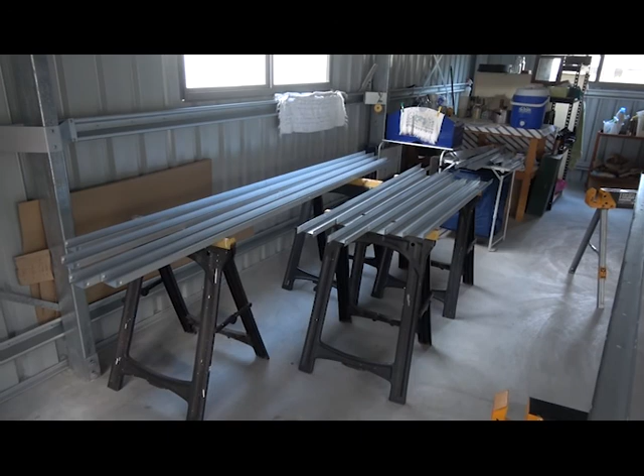Just lay them out on these couple of little trestles. So we've got all the bits and pieces, let's unpack them.

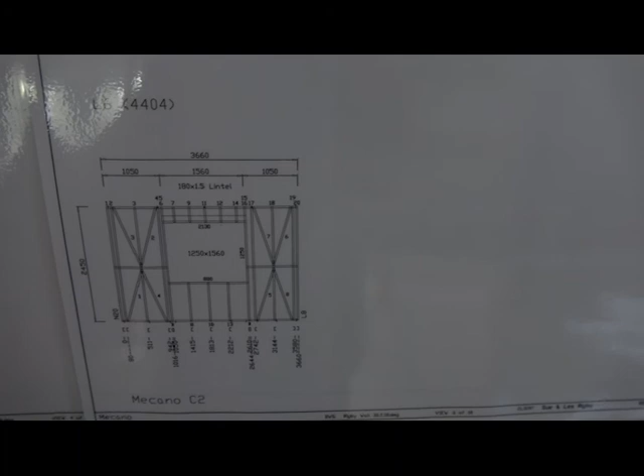Today we're going to be doing wall number... what are we? Let's have a look here. We're going to be doing this wall here, which is L6. Now it's along the back.

L6 is on the plan up here. This wall here is the bedroom wall, the back bedroom. That's the kitchen, bathroom area. It's this wall here that we're doing, so L6 is what we're looking at.

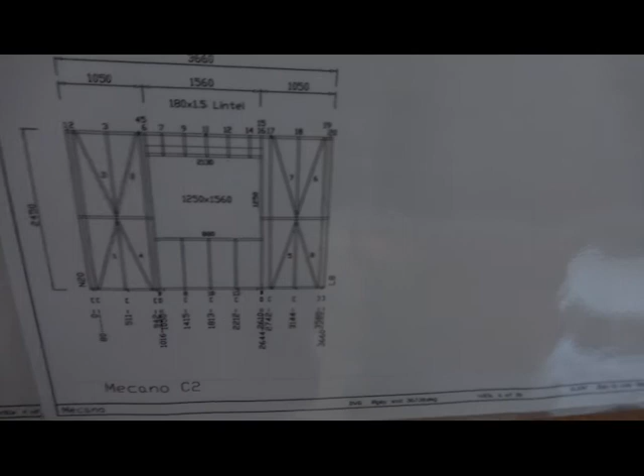As you can see, along the bottom here, it shows you which way the channels face. And that's very important.

Now what happens then is I'll lay them out, and if you come down to this channel, which is the bottom, this channel here is a bottom plate.

So that's the bottom, they mark them with a BP. And this is the top plate of this wall, plate 6.

Now we have all of the numbering on these beams. It's got to be on the left-hand side. So you work from the bottom, as long as the numbers are to the bottom plate and to the left-hand side, we're pretty right.

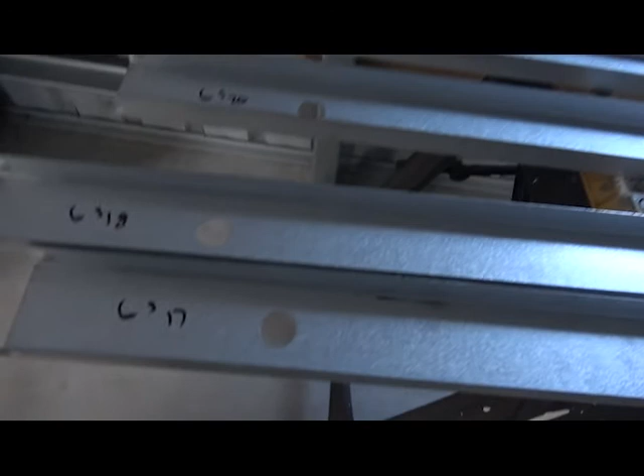Now we pick up number 1, stud number 1, which is this fella.

And it goes across, so we've got our numbers to the bottom, and we're on the bottom plate on this side.

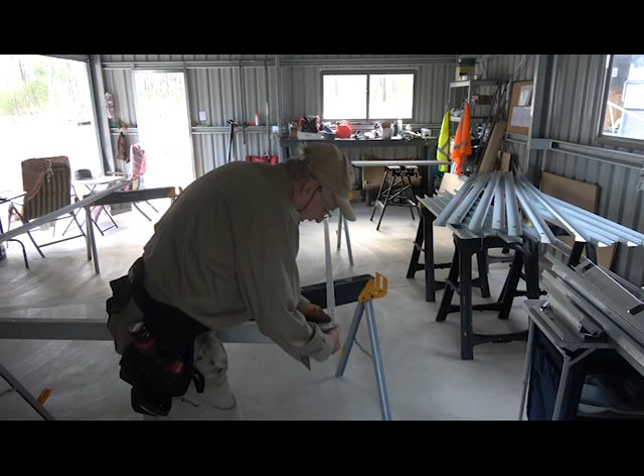So what happens is we put that together like that. They just click in, and then we just put a screw.

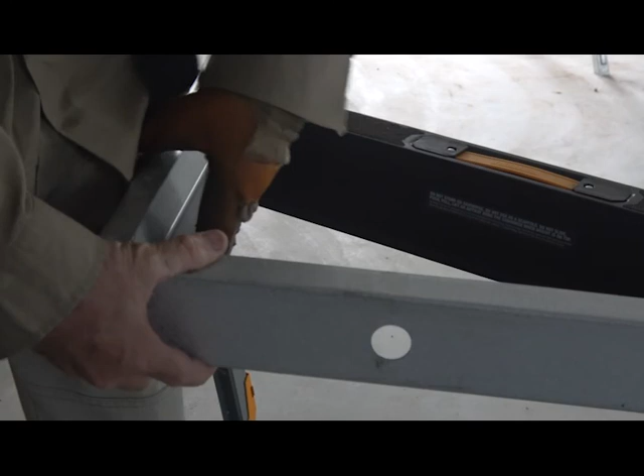Straight in there. So they fit in. There's a little dimple in the screw. There's a dimple on either side, and they just fit into that dimple and click in.

And then you line your hole up, and away you go.

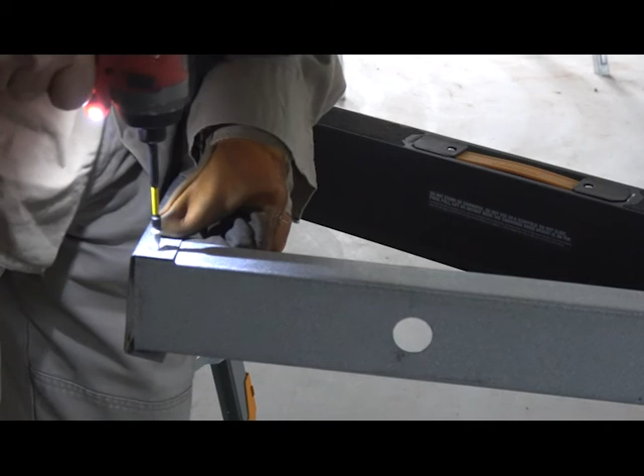Usually I rattle it up till I can see that edge there, the face there, up tight against the other piece.

Now all the studs are made just a little bit smaller than the bottom plate and the top plate so that they fit into each other. They're a couple of mils smaller, but those little dints are really good because they just line it up automatically basically.

Now the noggin part, this is the noggin, it's the bit that holds through there. So we've got to have the plate, this top plate facing up, and we slide these beams in through these little holes.

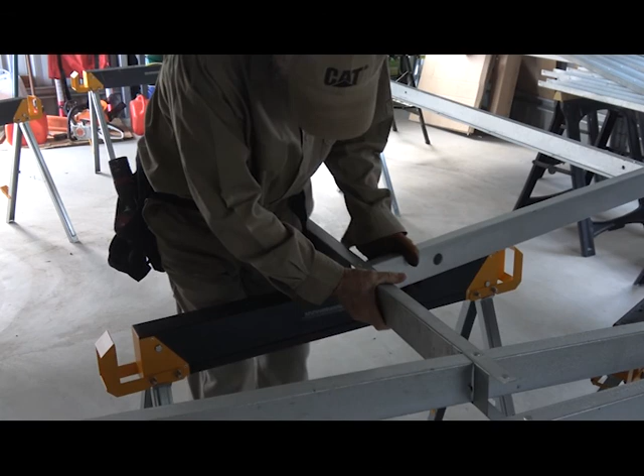This beam will be facing this way, as the plan says, and then we plonk them into here. Slide that in till we reach the middle dimple.

Now these then slot into the channel, slot into the channel.

Normally we use a rubber mallet basically to move them about. It's just a rubber mallet.

I don't know if you see over there onto that one. I can't reach the camera, but we just basically slot these into there.

I'll move out to this next one, number 4. 6, 2, 5. I have to go and find number 4.

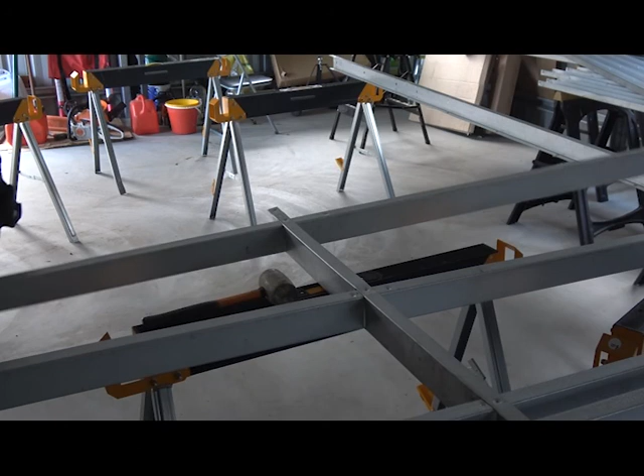Let me go up into that. Right there, this one will come into here.

And we've got to fix up that there. This end piece here is slipped underneath that piece there, so it's got to be over the top of it.

So it's over there. Right.

Now make sure this is all square again because we moved it around. Way out. That's square, and that's square.

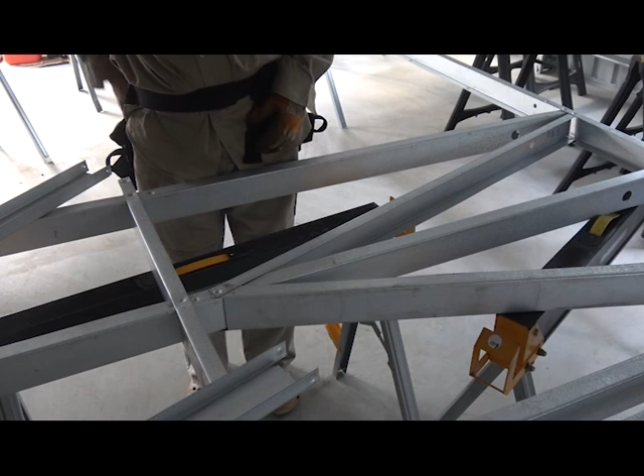Then we get, I've learned a few tricks. I get this thing, which is an awl, and I line the whole thing up with the awl. Handy little device, because you've got to screw it through those three points. We then take the old screwdriver, and it's in, and then so on and so forth for the rest of the bits and pieces on that section.

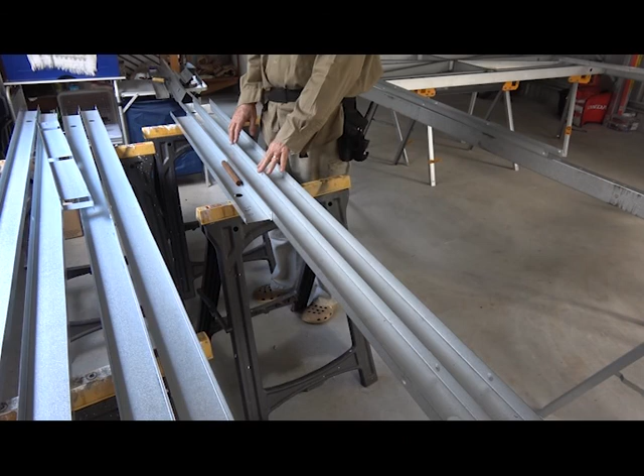Now this, this will be the edges of a window. There'll be a window going. So we've got to put two of these together on top of each other. This is number 15 and 16. So the 15 will be the first one. So that'll be the inside of the window. So it'll go over the top of the 16.

So what I do to make this a lot easier, I put a piece of timber in there, and I go up the other end here and line this all up. And we've got to remember, inside 15 will come over 16. So we pull those together, push them down, move that along, because it's pretty hard to line these up if you haven't got that bit of timber in there. Once it's started, once we get to about there, it just all cuts in. It's a lot quicker and easier.

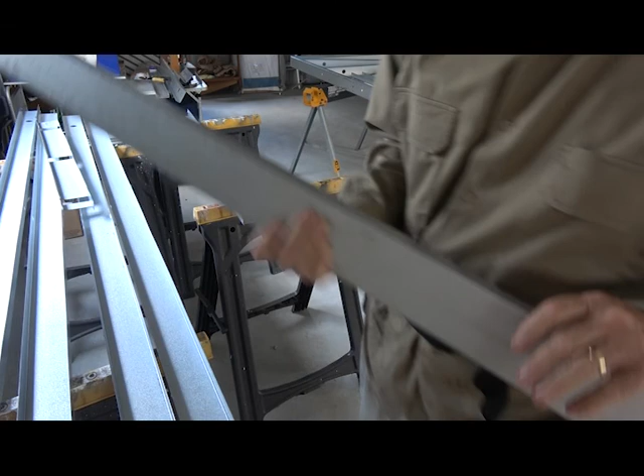And I usually just, we'll get that. Then we've got to make sure that our holes line up. That's the little hole just there. These are lining up pretty perfectly, so I don't have to move it up and down to sort of work it in. So what you end up with is a stud, a double stud like that, just a good one. Yeah.

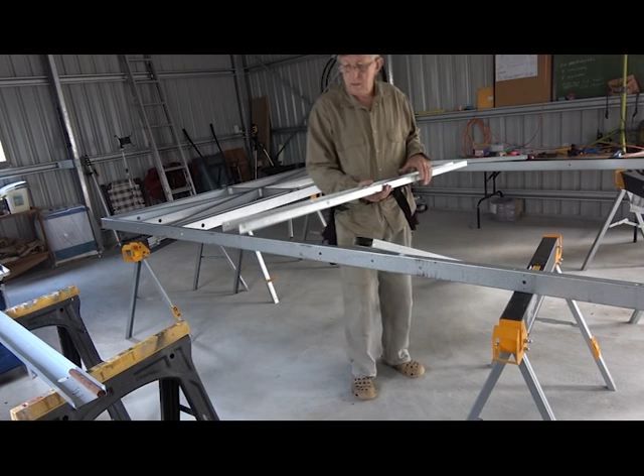Now it'll go in. We'll come around a bit. And we'll just move the camera up and I'll show you what's going on. Now it'll come in at this point. Because what we've got here is we've got a window sill and it's marked WSL on the end there. Now it goes to that end, and because it's a sill, it'll be facing up. So it sits in here somewhere. Right?

And then on the top, we've got a thing called a window head, and it's marked WH, which is the window head. And it sits up the top here, facing down, so you've got somewhere to put the window under. Now this one will go in, this beam here, will go in around about here. In fact, it won't be round about, it will be in. So we've got to get that into there, and put it in, and that's that one just there.

Right, that sits like that. And that's probably around the wrong way, because notice our holes are different. So we've probably put this in the wrong way around. So we'll pop it back out. Pretty hard without a mallet. And if I look in the end here, there's no writing. Turn it around the other way, and there's the writing on the inside to the bottom. So we'll go again. And there. That goes in there somewhere.